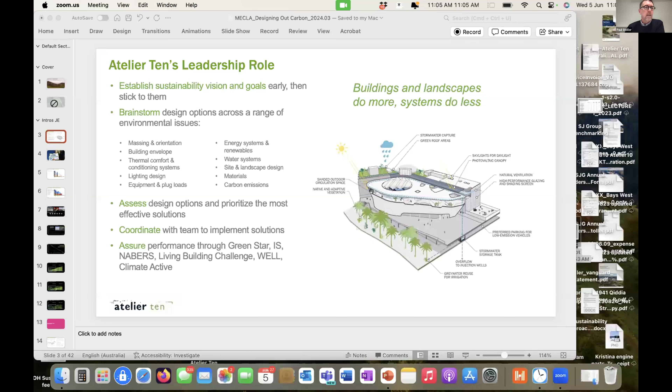So, again, g'day. My name is Paul Stoller, I'm a director of Atelier Ten. I'm going to set the stage to talk about what are the kinds of carbon emissions we think about and how to consider those as a designer when you're looking at projects in the built environment. And just to note, that's what we at Atelier Ten do every day - we imagine what is the more sustainable world that our projects can contribute to, brainstorm a whole range of ways to deliver sustainability outcomes, one's in the brief, one's beyond the brief, and figure out the most effective way to get there.

So this is a really exciting time. The climate is changing, and we as an industry are moving rapidly to catch up. I wouldn't say we're not changing, but we need to keep changing our practices and our thinking, and that's at the center of my talk. We have spent a good solid decade of data-driven Green Star rating assured thinking about how to reduce our operational emissions, the emissions that come when we buy power from our grid, which has a lot of emissions associated with mostly coal-fired power plants.

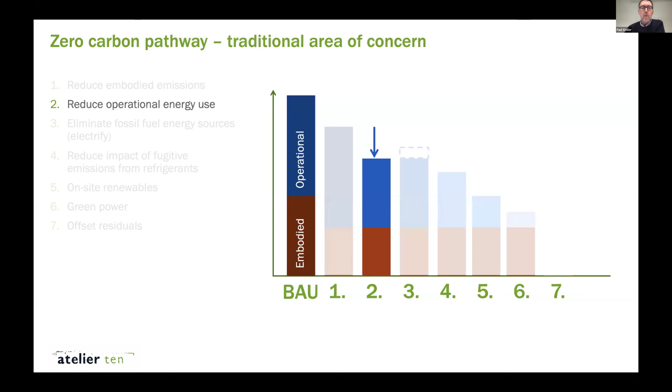We've thought a lot about how to reduce emissions and we're doing a very good job of that. But we're now in an era where we need to think about all the steps to reduce emissions in our buildings, from embodied emissions in materials and construction, right down to wonky things like fugitive emissions from refrigerants, green power, and so on. I'll be talking about operational and embodied emissions as a designer, which are the two biggest chunks.

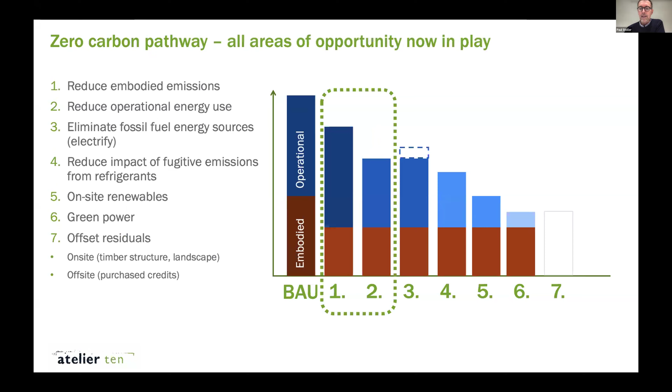As a reminder, embodied emissions are the greenhouse gases emitted when materials are extracted from the ground, processed, turned into products, moved to your site, put into your buildings, and got ready to run. They also include the end of life of your materials, what happens after they come out of your building—that will be more the subject of Philomena's talk, and better ways to find new life for our products. Operational emissions are associated with the power we buy.

It's the stuff that comes out of smokestacks at coal-fired or gas-fired power plants, much in discussion these days. Globally, greenhouse gas emissions in most power grids are going down because of renewables being added to the grid.

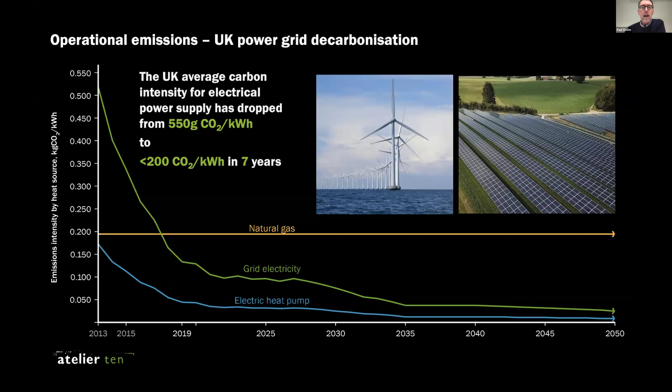You can see here the emissions intensity of the UK power grid, which fell off a cliff in a good way between 2013 and 2019, to the point that it's radically changed the way we think about designing buildings overseas. Here in Australia, we're not quite that far along our journey, but we're moving quickly to add renewables to the grid.

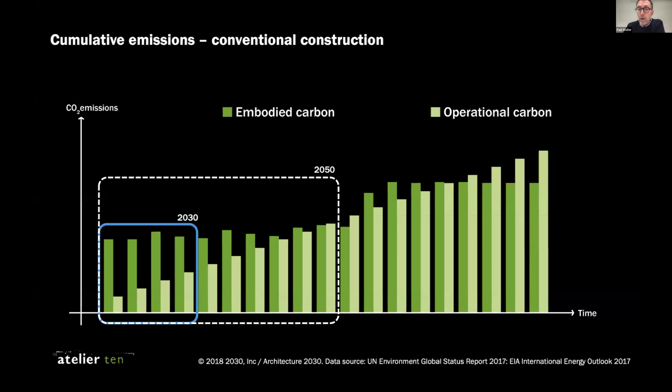So what does this mean for our buildings? Conventionally we thought operational emissions really dominate, especially when our buildings weren't very efficient. But with a good, new, energy efficient building, we can see that even now, with our current grid emissions, embodied carbon is dominant for at least the next 20 years in a typical building. We really need to think about embodied carbon as much as we think about operational carbon.

Now, for super efficient buildings, embodied carbon is dominant. As a person, and as a company committed to absolute zero carbon, we spend a lot of time now driving down embodied carbon in our projects. Operational carbon is of secondary importance, and it's also less time sensitive, because we need to get rid of emissions now, and the embodied emissions happen now.

Interestingly, as our grid decarbonizes—which we're seeing elsewhere in the world and happening here—and as we add renewable power to our buildings, either directly or by buying it when emissions are low and storing it, we also see that the embodied emissions dominate forever. So really, getting rid of embodied emissions is the name of the day.

As we come into a typical day, in the middle of the night there's a background power load. As renewables come online in the morning, as the sun shines and the wind blows, you can see the emissions intensity drops. You can also see over the years it's dropping more and more as more renewables come online. In the evening, when everyone goes home and the sun's gone down, emissions spike as we all get our cookers running and our heat pumps running for heating or cooling.

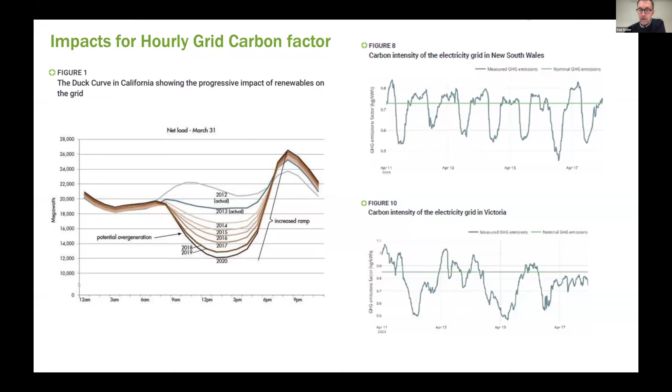You can see on the right side the emissions intensity reflected in a 24-hour cycle as the renewables come in and out. We need to shift our loads to that most efficient, emissions-efficient time of day.

These are really practical things you can do without buying a single new piece of kit—so no embodied emissions intensity penalties with this.

You can pre-cool your building. So when it's morning and emissions are going down, you can run your building on the cold side, then let the temperature drift up during the day. That's not a design thing, but it's what everyone can do right now with their buildings. It's done at buildings that are well run, like UTS Business School and the Sydney Opera House. With a little bit of kit, adding thermal storage tanks, you can run your buildings, say on a weekend, store up thermal energy, hot water or cold water, and discharge it the next day. You can buy yourself time-of-day or even multi-day power shifting.

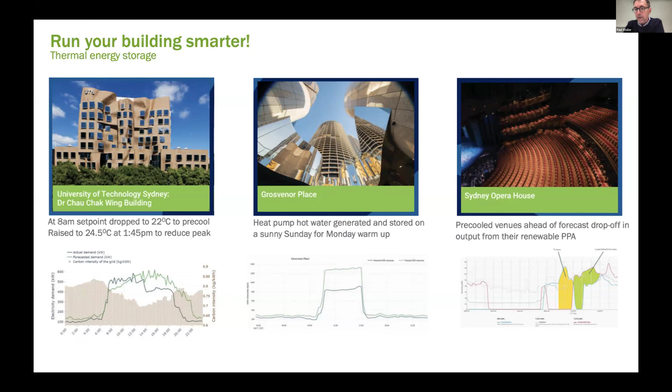That raises a practical point about what design consideration this needs. You can already do it to some degree just by running hot or cold, but if you leave space in buildings for thermal storage, essentially tanks to store chilled or hot water, you can do pretty active load shifting. Thermal energy storage is as good as electrical energy storage. It's a practical, very low-tech way to store energy so you can generate your cooling or heating when grid emissions are low and discharge them when grid emissions are high.

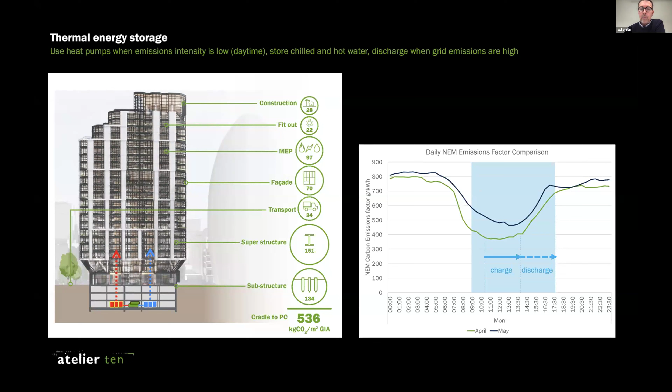This is practically a great way to move towards what we call absolute zero carbon—more on that in a moment. The next step beyond thermal energy storage is battery storage. Just like we store thermal energy, we store electrical energy in electrical batteries, charge those up when grid emissions are low, and discharge them in your building when grid emissions are high.

Some would argue we should be doing this at grid scale, and that is where a lot of it's happening, but there are practical benefits to doing it at building scale. We move the load around and reduce the need for transmission lines—there are big system benefits. There are also real cost benefits: if you actively manage your power to buy it when it's cheap and emissions intensity is low, you reduce your building's operating cost. If you participate in a virtual power plant, there are ways to get rewarded.

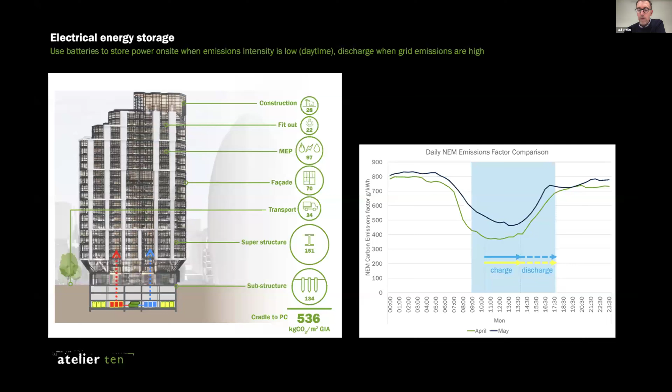So having space for power energy storage on site is step number one in reducing operational emissions—store energy when the intensity is low. This is a critical thinking shift that's happened overseas and should be starting to happen here. California has fundamentally changed the way carbon performance is measured—it's called total system benefit there. At Atelier Ten, we wrote a paper on this several years ago, the future of carbon neutral design, exploring how designers consider the importance of time-of-day carbon use and energy storage.

You're welcome to find and download that paper—it's on our website. The critical thing here is we have to be thinking about operational carbon and embodied carbon back and forth. They interact, they need space, they have consequences. It is not just a one-and-out process, not just operational, not just embodied.

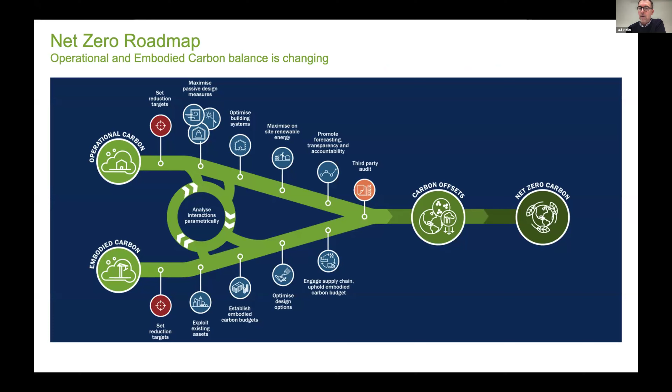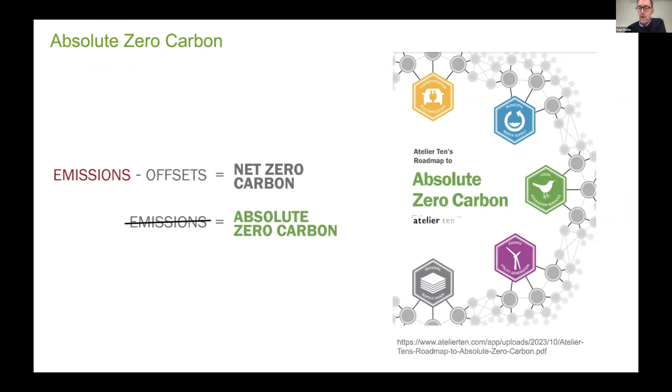I mentioned before this term, absolute zero carbon. We at Atelier Ten, and many we work with in industry, acknowledge the importance of offsetting, which gets us to net zero carbon, which we're all committed to. But we also need to think about absolute zero carbon—actions we can take right now to reduce actual emissions right away without having to compensate elsewhere. This is the most effective way to get to a climate active outcome. Again, we've written a paper on it, and you're welcome to download that.

Now let's shift gears and talk about getting rid of materials. The best way to reduce our embodied carbon, which goes into the atmosphere right now, is to get rid of material. Here's a graph showing where the bulk of the material is—the bulk of it's in the structure. So structural engineers, this is your chance to be a hero. Architects, this is your chance to be a co-hero by not putting undue structural demands on your projects.

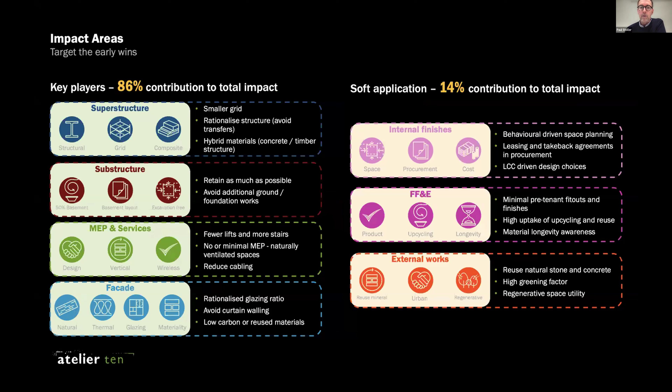Again, it depends on the kind of building, but the vast majority is in structure, superstructure, facades, and MEP—more than half typically in superstructure and structure. Finishes, FF&E, and fit-out matter too, especially because they tend to churn at a high rate, unfortunately, but the vast preponderance is in the building core. So practical things we can do as designers include, like the project on the left, taking an underloved old building and giving it love to make it awesome and new.

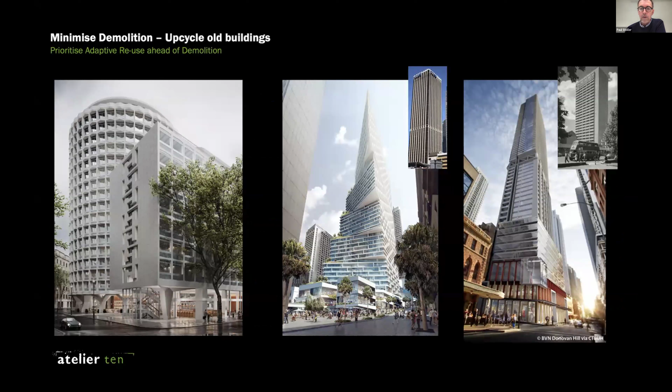We've done really great examples of that in a very deep way here in Sydney with Quay Quarter Tower and the Greenland Residential Tower. Those were old structures given new life to keep their cores and floors active—substantial, deep, adaptive reuse retrofits, really great examples.

Other things you can do where you are doing a new building: get rid of basement space, get rid of structure, get rid of materials, think structural efficiency. A huge amount of embodied emissions go away when you rationalize your structure.

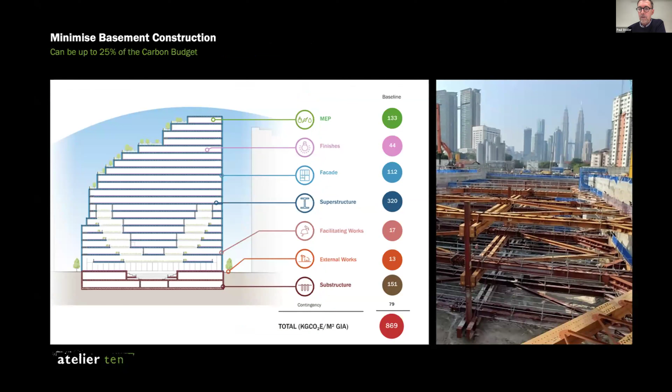Specifically basements, lots and lots of material, lots of embodied carbon. Basement space can be low value. Often there's parking, which is high value in Sydney still and elsewhere in Australia, but there's a huge amount of emissions tied up in those substructures, especially in the works to hold them up. So just get rid of them.

That's really critical. Build lower. You can see the taller we build, the more we've got to do with wind load, pushes up the core loads, et cetera. Not to say we don't do tall buildings, but there's a point of diminishing returns around 30 stories. It also happens to work out well with lifting.

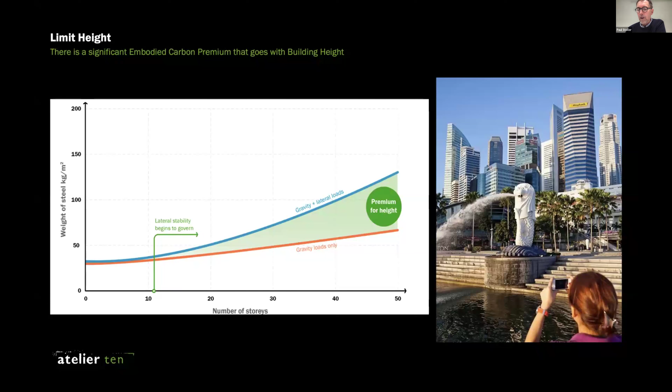Form factor matters a little bit. We wouldn't normally push this one hard because if you get buildings too cubic in proportions, you end up with bad daylight in the middle, but it does matter a bit.

Column grids, these matter a lot. If we reduce column grids even a little bit, we can knock 15, 20% out of the total structural volume. That is real dollars saved. It freaks out the leasing agents, but they'll come around eventually.

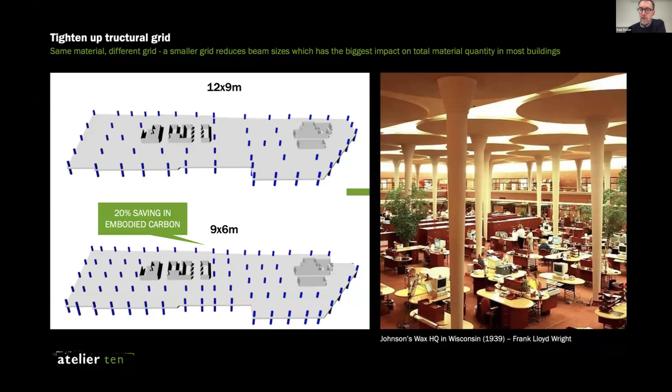It's a long game. Cantilevers, a little bit for drama, sure, but fundamentally, they are enormously material intensive. There's an example here in Sydney of a building under construction right now where a design excellence proposal to get rid of columns, to make a more dynamic street presence, has led to the equivalent of 20 stories of floor, concrete, and steel for one transfer level—20 stories of embodied carbon to get rid of 3 columns. I appreciate that streetscape may be a little more dynamic, but I don't think that's worth it.

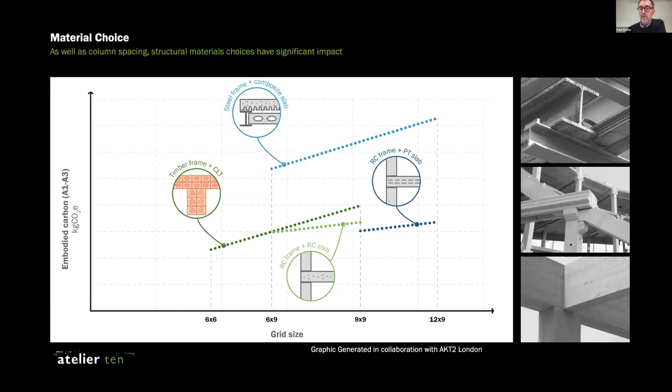We've got good data now on relatively carbon efficient structures. Essentially, reinforced concrete frames are the most effective way to go to balance spans with relatively low embodied carbon structures. Timber is also good, of course. Spans are a bit lower. Timber is also lighter, which reduces foundation loads. That's one of the real carbon benefits of timber—it makes for lightweight foundations.

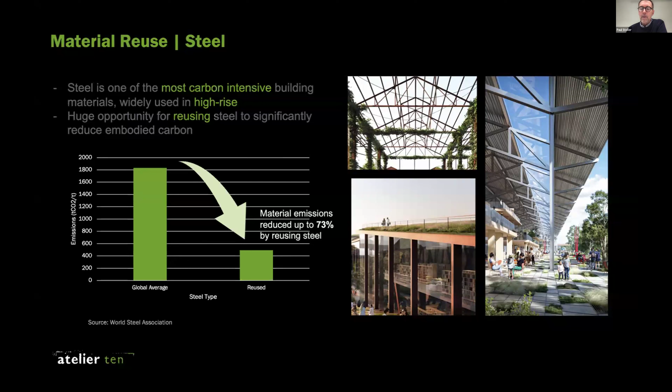Something new we are seeing in the UK is not just building with less, but actually taking old buildings, disassembling them, and putting those materials to use in new buildings. So existing office buildings that are coming down, steel frame, quite different than Australia typically—those old buildings are being bought, disassembled by the builders, and the steel is put back to use in new buildings. A market has been generated for this, and it is active. Massive embodied carbon reduction. This is, again, steel reuse: take the old steel, cut it, test it, cut it, put it into a new building.

MEP—we've made systems very complicated in the service of ultimate efficiency. We are now making them less complicated to get rid of kit. That extra little bit of marginal performance is just not worth it in terms of embodied carbon, massive uptick. So lots and lots of these things together get us to substantial embodied carbon reductions.

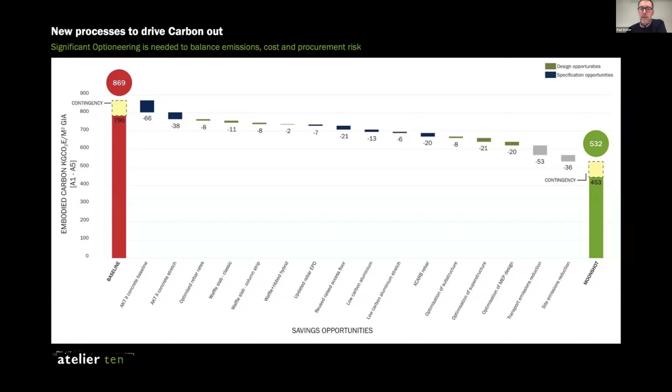It's a long, hard slog. There is no silver bullet, let us be clear, but we need to tackle them all. We're getting better data—MECLA is central to that, getting better data. We're all developing better methods. We all need to keep sharing those methods. It's critical to do that.

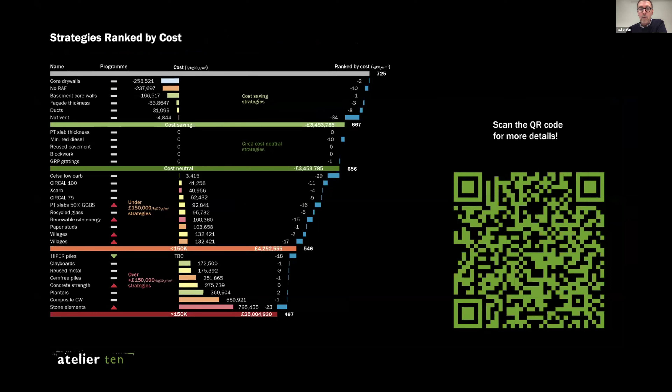You're welcome to scan these, look at some of the tools we've developed to tackle embodied carbon, which includes games, because God, this can be so tedious sometimes. Carbon accounting is, oh, for the obsessive compulsives out there, cool—I know you love it, I love it too—but make it fun wherever you can, so you can also raise awareness.

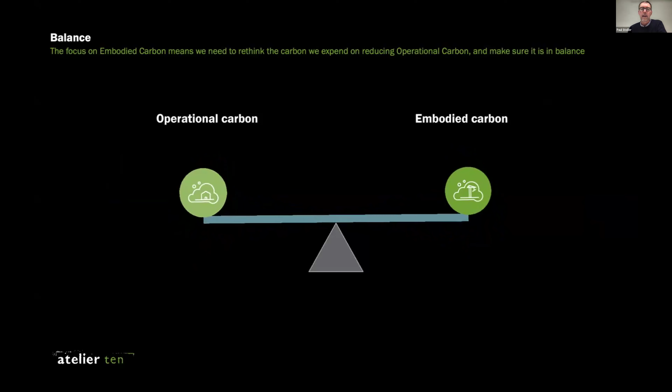Design processes have to change and are changing, so that we can better balance operational emissions, which are perhaps a bit less important than they used to be, compared to embodied carbon, which is absolutely important right now. And a reminder, we need to do this in parallel, in sync, in all of our projects.

So just reintroducing myself, I'm Philomena Bashar, I'm a sustainability manager at Built. Today I'm going to tell you a little bit more about our newly released white paper on how to write a building disassembly plan that Built co-wrote with circularity consultant Coreo. So just a very quick snippet about who's Built. We're a construction management company, the third largest company that does that in Australia, and we have offices also in the UK and New Zealand. We have been around for over 25 years.

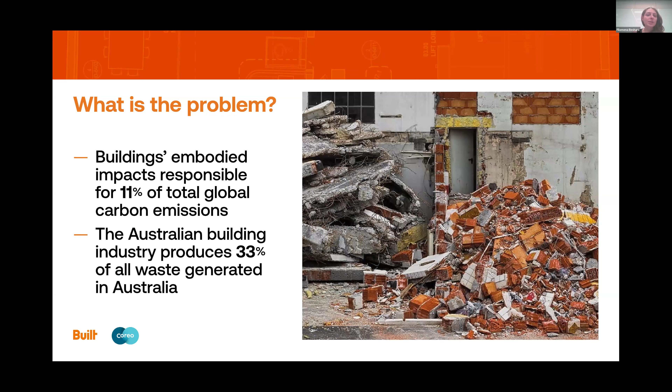Let's talk about the problem. What really pushed us to write a paper around design for disassembly? We're all here, so we probably all know the impact of buildings on total global carbon emissions. It's huge. But the other problem is that the Australian building industry is also responsible for a big chunk of all waste generated in Australia. So in order to solve these problems, we need to think about the construction industry in a more circular way. And design for disassembly presents itself as one of the solutions available out there.

So a quick reminder for people who never heard about design for disassembly. What is it? It's really a design technique that enables material components and products to be dismantled at the end of the building's life cycle, so they can be reused, resold, donated, or recycled. As I said, it's just one of the tools in the toolkit in order for the building industry to become more circular. The white paper that we wrote focuses on how to write a building disassembly plan.

And you're probably wondering, what is a building disassembly plan? If you think of an IKEA manual, it really tells you step by step how you need to assemble all the components of your piece of furniture so that it comes together. A building disassembly plan is obviously for a building, and it's a little bit of a reverse of that. So it's a manual that tells you how do you take this building apart, from the first component until the last one.

We found that this was a crucial document if we're thinking about designing for disassembly, because you must have all the right information available for when the building is going to be coming apart, so that you can disassemble all the components in a non-destructive way and reuse them elsewhere. We thought it was really crucial also because a building designed for disassembly is potentially going to be taken apart 10, 20, 30 years after project completion. Therefore it's very important that there is a document that is the only source of truth, compiling all the right information so that its components can be taken apart and reused elsewhere, even while the building has probably changed ownership multiple times during that period.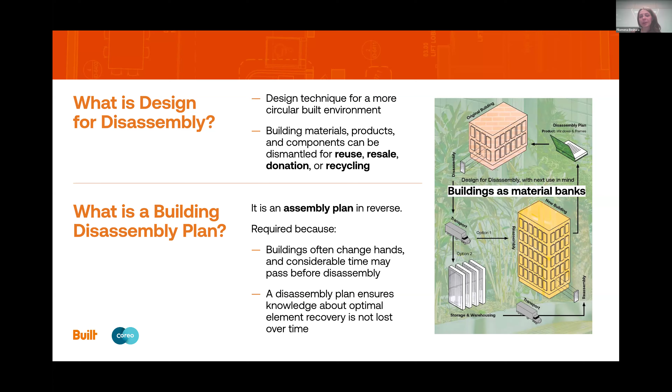So why do we think design for disassembly is relevant? Well, first and foremost, because, big reminder, we actually have a target in Australia to be 100% circular by 2030. And currently Australia is probably in the single digits. Also, for whoever's been paying attention, there's been a flurry of policies in the last couple of weeks that mention circularity and specifically design for disassembly quite a lot, especially looking at the recommendations to the government by CMAG, or the environmentally sustainable procurement policy, which is going to be affecting a lot of government projects. So these policies are not just pieces of paper, but really strong signals from the government telling us where they want the construction and building industry to go.

It's becoming harder and harder not to listen to those signals. The other reason why design for disassembly is really relevant is because buildings have a huge impact on the environment, and design for disassembly presents itself as one of the solutions to lower the carbon emissions associated with new construction by using existing materials and honoring the embodied carbon already embedded in them. That allows us not only to lower carbon emissions but also to minimize the negative impact on nature by reducing the need for virgin materials.

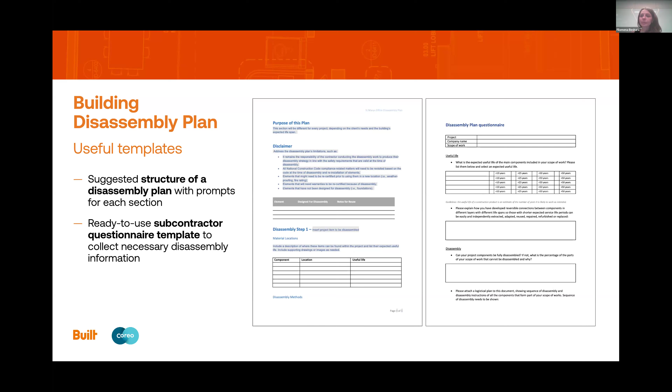Okay, so the paper is also going to include a sample section. Again, this is based on a real example of writing a disassembly plan. It's going to include a little paragraph around what building component we're talking about, where it's located, exactly like an IKEA manual, as I explained before.

And then there's going to be a narrative about how these components can be taken apart in a non-destructive manner. That narrative can be translated in many different ways—through the use of BIM models, marked up shop drawings, photographs—depending on the owner's directives and the ways the subcontractor feels more comfortable generating that information for you.

The section is also going to include a paragraph about storage and notes for recovery, so that 10, 20, 30 years from now, whenever you're taking those elements of the building apart, you also know how to store them properly so you can retain as much value out of it as possible.

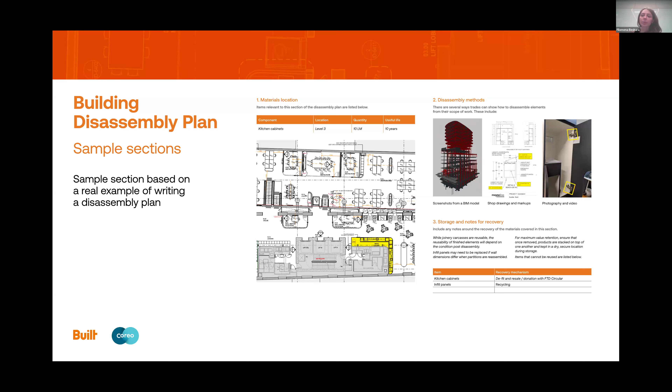The paper is also going to include frequently asked questions. How do I start designing for disassembly? There's plenty of resources out there, so we're going to point you in the right direction. We talk about the value of design for disassembly, what the enabling factors are, how to make it happen on a project, and also my favorite question, the one I get asked the most, which is, does it cost more?

We also included some case studies from other projects that have implemented design for disassembly, and we share some inventory platforms available here in Australia to facilitate data collection in case you want to go a step further on your project. Finally, we've included some insights from writing a design for disassembly plan on projects.

We are really keen to hear from the industry, get some feedback, and improve the way we are doing design for disassembly in Australia.

And that was everything from me. I invite you all to please scan the QR code or go on Built's website and go check out our latest paper. Thank you. Philomena, thank you very much.

I think the key word there was non-destructive disassembly. We've all seen the bulldozers and the grabbers and the ripping apart of built form, so that's a key word. Also the fact that you touched on cost, one of the questions in the Q&A was about that, so maybe you could respond to that in the Q&A. Great that there's a case study that goes to that, because anyone with a commercial interest in a building will be asking that question. That'll be the first question, Hansen.

Okay, get myself sorted. Hopefully you can see that. Why can't I get to... There we go. All right.

So I'm Paul Reedy from Fitzpatrick and Partners Architects in Sydney. I'm going to rattle through the first three pieces of this, hopefully relatively quickly, in order to get to the case studies. The case studies I'm going to show are a built project which is an adaptive reuse, a project in design that's an adaptive reuse, and a living building challenge project that we're working on at the moment as well.

I'd like to start with an acknowledgement of country. Our studio is on Gadigal land, as is one of the projects I'm going to show. The other two projects are on Camaragal land and Wadjuk land in Perth. I'd like to pay my respects to elders past, present and emerging.

For Fitzpatrick and Partners, design and carbon strategies kind of started as a 'how do we start, how do we move forward' with a series of strategies. On the left-hand side, we've got some really big picture strategies around not building on greenfield sites, planting more than we remove, honoring existing already spent carbon, and remembering within all of this that we design for human joy and delight. We don't design to remove carbon - that's a part of the process of getting there.

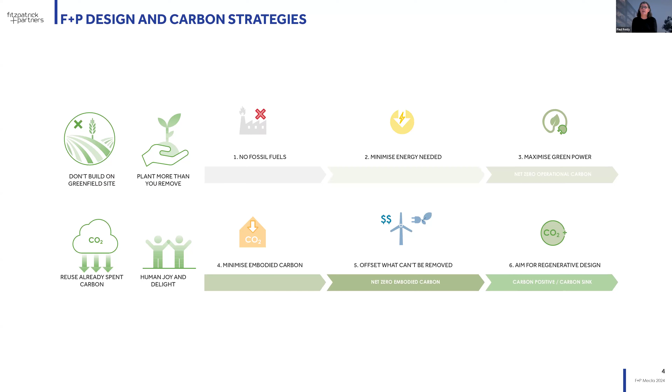And then some tactical steps on that: no fossil fuels in our projects, minimizing the energy that we need by building efficiently, and maximizing green power gets us to effectively a net zero operational carbon position. Today's topic is minimizing embodied carbon, offsetting what we can't remove - Paul mentioned offsets earlier, agree, it's a bit of a bad topic - but anyway, our aim is for regenerative design, being carbon positive, leaving more than we take away.

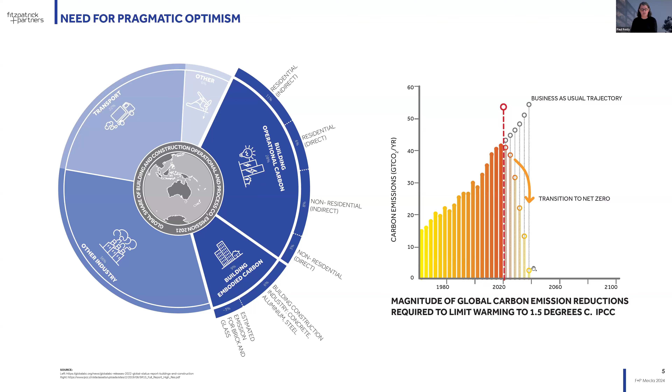Everybody's probably seen the diagram or a version of it on the left-hand side, about the quantum of carbon that's in buildings relative to everything else. Today we're going to talk about the bottom slice, which is embodied carbon. The diagram on the right talks to the history of where carbon in the atmosphere has gone and where we need to take it. At Fitzpatrick and Partners, we're taking a pragmatic, optimistic approach - a straight line between two points. We need to plan for it and just get on with it.

Embodied carbon is made up of the in-use stage and the upfront stage. Another way of looking at that is the pie chart - they're effectively 50-50, not quite. In terms of where the carbon is, the first half is the construction project, the architecture project, etc. This carbon is released into the atmosphere before the project is occupied - that's upfront carbon. The other half is the embodied carbon in the occupied life of the project.

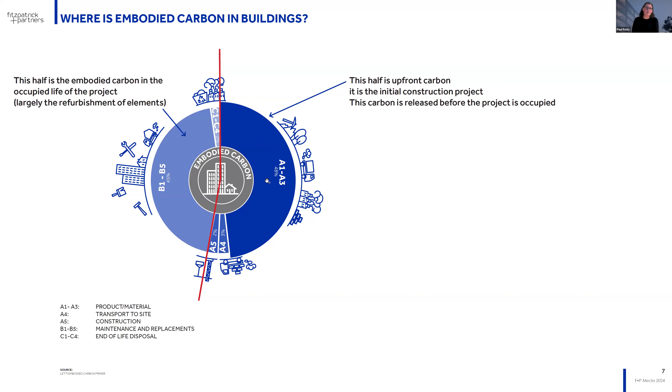That's largely the refurbishment of the elements over time, which relates to how long the building lasts. Our focus is on the front bit, where the architecture project is, to look at the scale of the different components. This is for a generic office building, and the numbers slide around between different sectors, but fundamentally superstructure is the biggest, substructure second, then facade, MEP, and internal finishes as a hierarchy.

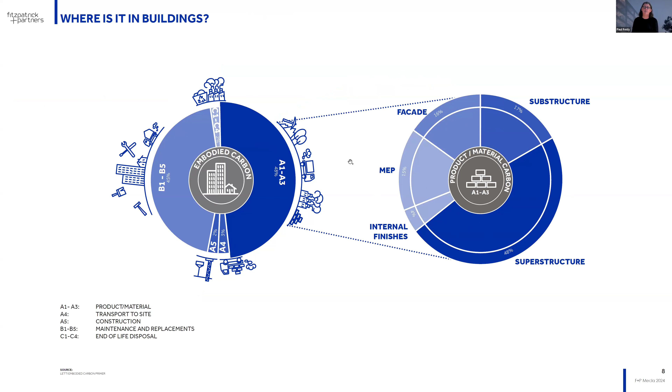So we started by looking at structure. An approach that LETI put forward — I think this is a LETI diagram, it's a really great diagram.

First and foremost, build less — if you don't build at all, that's no carbon. If you build less or build more efficiently, that's good. Build light — conceptually that's about grids and structure and some points Paul made earlier. Build wise, which is circular principles. As Philomena talked about, build in low carbon or biogenic materials, build for the future — designing for disassembly and circularity — and build collaborative. We can do this together; we can't really do this at all on our own.

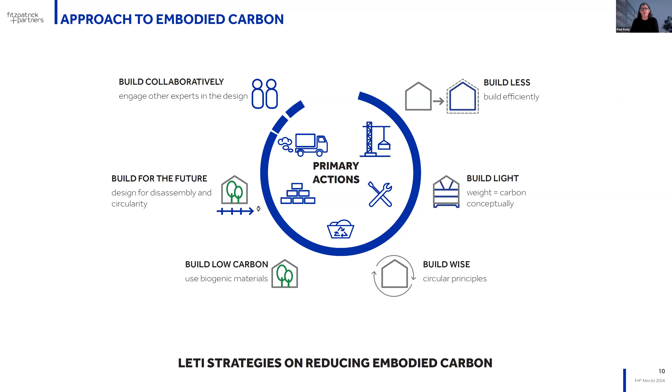From Fitzpatrick and Partners' point of view, we added some first steps, which is accept responsibility. Architecture equals carbon — there is carbon in architecture. That's a fact. We've got to start with that knowledge and move forward from there.

We've got to learn as we go. I think the industry as a whole has a deficit in terms of knowledge. Get measuring — you can't manage what you don't measure. Understand the supply chain — why is one person's concrete different to another person's concrete in terms of its number? Remember there are rabbit holes and you will disappear down them, so just come back up for air from time to time. And then sharing and advocating is really what today is about.

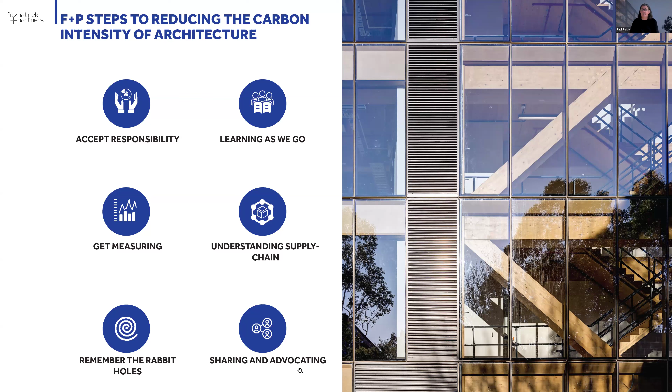From Fitzpatrick's point of view, we developed an embodied carbon tool — you can get it at embodiedcarbons.com. It allowed us to analyze against three different data sets to understand that the three generic data sets gave us different numbers and that they weren't consistent. We learned a lot by understanding that kind of process.

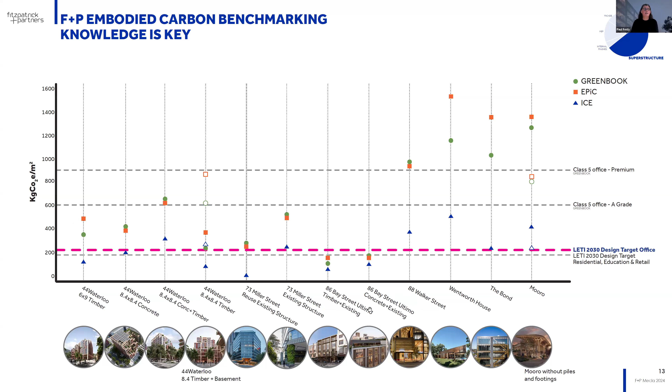That tool is available publicly, with two freely available ones being EPiC and ICE as well. We've used it to chart all of our projects trying to get to some form of benchmark. The benchmark here in pink is the LETI 2030 design target for office, reduced for just the structural component, and we measure with the blue triangles — the ICE database, the relevant data set for LETI — where our projects sit relative to that. Some are already below, which is fantastic; some are above, which is something for us to learn, and generally that's around smaller projects or really, really tall projects.

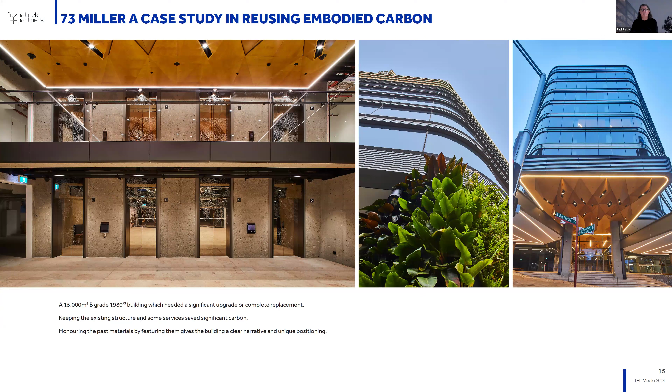More on that later. So the first one is 73 Miller. We completed this project about 2.5 years ago in North Sydney on Cammeraygal country. The building was a 15,000 square meter B-grade office from the 80s, which we were looking at either pulling down or significantly refurbishing. Keeping the existing structure and services saved an awful lot of carbon, and honoring the past materials of the building — built over a series of different ages — gave us a unique proposition in terms of how the architecture came together.

That's what it looked like when we came to it — a very 1980s building, lots of angles, lots of terraces. It was pretty tired, pretty anonymous from the street. And we changed it to look like this — we added 4,000 square meters of building. This building now contains TTW's offices, LCI's offices, and Aurecon's offices. Engineers love this building.

There are other people involved as well, but it's come together as a really good project. I think some of the real outcomes for us were that reusing all of the existing structure and services saved significant carbon.

We ended up with 19,000 square meters of A-grade office building for only 4,000 square meters of new structural carbon, which reused 7.1 million kilos of carbon. The structural carbon cost only 21 kilograms of CO2 per meter squared, which by any metrics is awesome, because we only spent 4,000 to get 19.

The building also has 100% green power, a 5-star Green Star rating and 6-star NABERS. It's got a solar farm on the roof and a series of other really good upgrades as well.

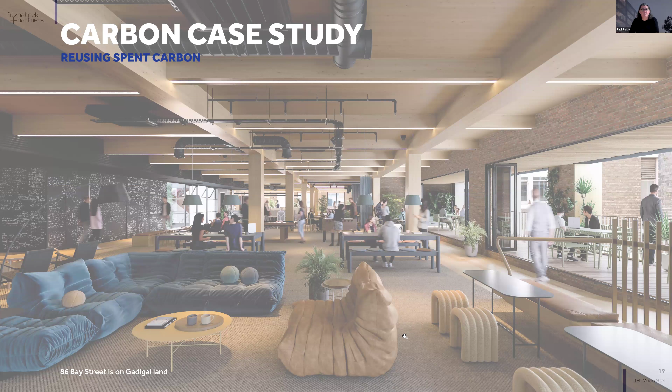So that's a built one. The next one is a building we're out to tender on at the moment - a carbon case study for reusing embodied carbon at 86 Bay Street.

Really exciting project. It's awesome, isn't it? I'm sure everybody loves it. Ours is the building in the middle - before, an ugly duckling, and after.

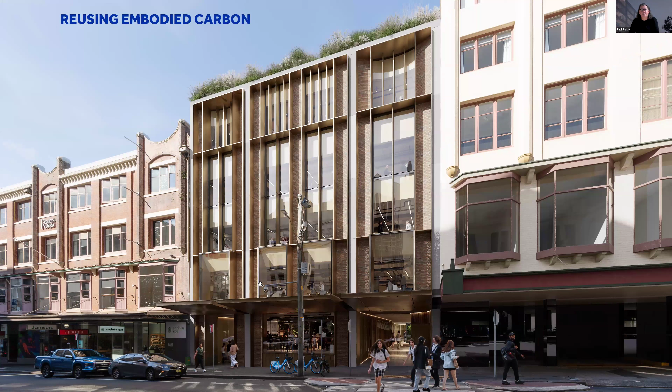So what we intend to build at 86 Bay Street fits in between two heritage projects, maintains the existing building's structure - or the vast majority of it - and puts a new building on top of it and around it. In essence, we've maintained the bottom 3 floors, which are concrete.

We've brought a new light well through the back of it, and added 3 stories on top in timber. So the focus has been first and foremost on embodied carbon.

Secondly, it's a fully electric building, so no fossil fuels. It's got a solar farm on the roof, operable facades both to the laneway and to the courtyard, and a whole series of other really cool initiatives in terms of sustainability.

But the big move here was keeping the existing building. Rather than demolishing it, by keeping it we kept the slightly lower floor-to-floors on the bottom 3 floors, which allowed us to sneak an extra floor in.

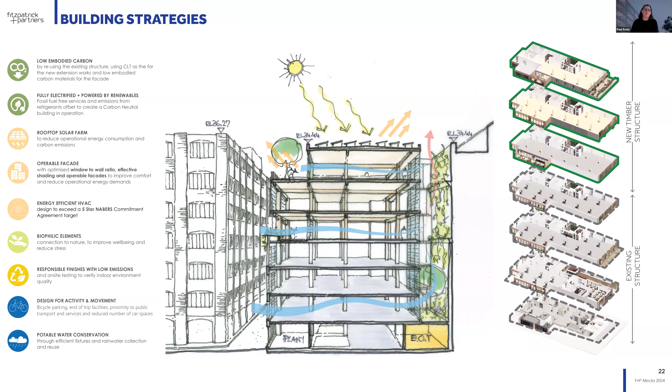So from a project finance point of view, this made a lot of sense, as well as obviously from a sustainability perspective. The first thing we did was assess the new build on top in timber rather than concrete. Retaining the existing building saved us 450,000 kilos of CO2.

Adding the new floors in timber rather than conventional concrete saved an additional 410,000, and we avoided spending 1.7 million kilos by not demolishing it and rebuilding in concrete. So all in all, a really good story in terms of embodied carbon numbers, using the app to assess against different data sets and really understand where the big bang for buck was.

So I'm probably going to spend most of my time on this, which is a Living Building Challenge project in Perth, in Wadjuk country. Living Building Challenge, for those who don't know, is a really great tool, a really great philosophy about how to build.

This building will produce 105% of its own power on site. It'll capture and reuse all of its own water, including black water treatment, with a super high-performance building envelope that really drives down energy - more about that in a minute.

Embodied energy minimization has been a real focus, and there are some real lessons to learn in that. Optimizing for transport use, it sits within a couple hundred meters of a train station.

Biodiversity is another great part of the LBC, and 10% of this building's roof will be an urban farm. And then obviously the aim is to build an exemplar live-work building - a whole series of different initiatives.

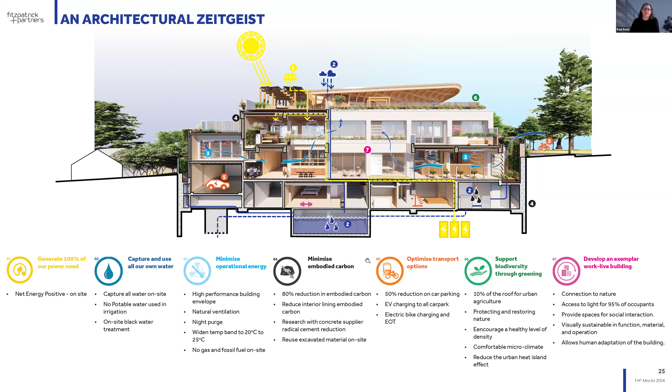I'm going to focus on the carbon-related ones in the main. The first of which is to make the carbon apparent. So in this instance, what we did was look at the building in terms of its materials.

In blue, sorry, I'll just move you guys out of the way - in blue you'll see the concrete. In pink is rammed earth. In green is blockwork, and yellow is timber.

It's a single basement for 12 cars, end-of-trip facilities, a gym, and a lot of plant space. That's in concrete and rammed earth. Above that, it's mass timber, rammed earth and brickwork walls.

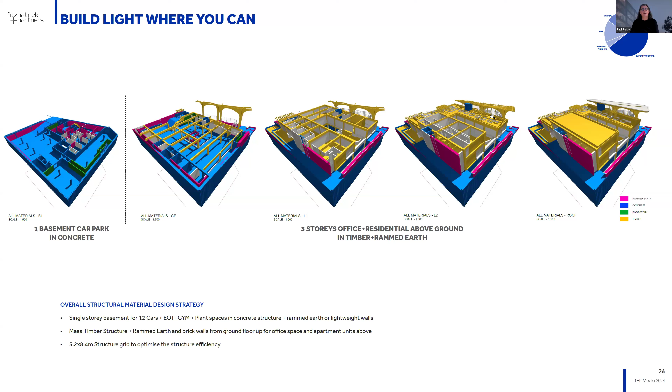And then the structural grid has been optimized for material efficiency. This is building light where we can, so everything above ground is in timber, fundamentally as a structure.

We then looked at that ground floor slab - talking about building weight. And we looked at 9 different options for that ground floor slab.

We analyzed them in a 2-bay grid, and we looked at the carbon content of each of those using conventional concrete and steel to see where the carbon was. We then looked at what happens if we use a geopolymer concrete and conventional steel.

Option 8 in this instance went from 19,000 kilos in that 2-bay grid to 9,500. Option 3 is only 9,800 kilos in that 2-bay grid. So this is about relativity rather than about final numbers.

We then looked at what happens if we use reused steel and geopolymer concrete, and we were able to push option 6 into the mix, which was steel beams and metal deck slab, getting down to 6,800. In the end, we didn't do that because we couldn't get the steelwork tested without shipping it all over the country, and that became something of a problem for us.

So rather than do that, we opted for the conventional system, which is reinforced concrete flat slab with drop panels, which got us to 9,800. So already half what the previous number was, and relative to the top number, which is 73,000, which would have been a very beautiful brick vault.

But we did that to try and save carbon, and then realized there was an awful lot of carbon in what we were trying to save. So we opted for option 3 in that instance.

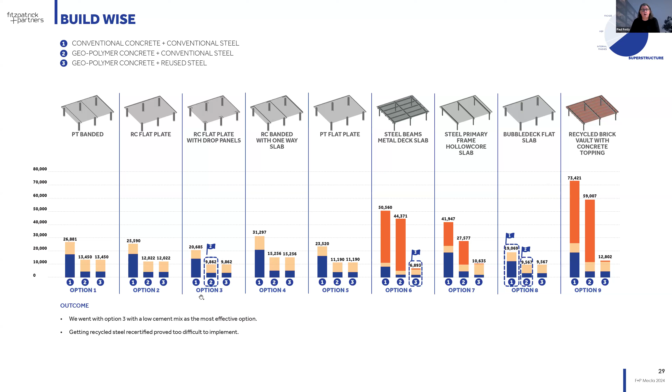We then look at carbon in terms of building low carbon. So when we analyze the building, this fundamentally looks, feels, and is a timber building. But when you look at the carbon, it's all in the bottom of the building. So looking at it by structure, B2, which doesn't actually exist, it's just tanks and piers or piles, sorry.

B1, which is our first basement, is our biggest component of carbon. Then the ground floor, of which in blue you can see the carbon that's in the concrete, level 1 and level 2. Or looked at across elements.

The biggest elements are actually the piles and the footings, followed by slabs and walls. So that's an awful lot of carbon to get to this building, and that's to do with the fact that we built a basement on land that is pretty soft.

Then we looked at building in low carbon. So rather than having that B1 slab at conventional concrete, we looked at what happens if we go to a Boral Envisia type product, and we save 280,000 kilos.

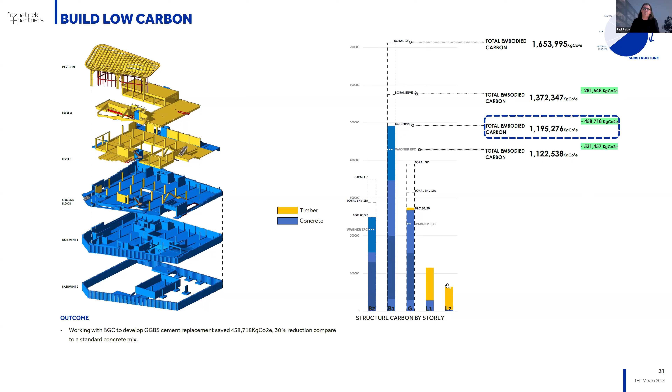We looked at it, we're experimenting with BGC on a really high performance, low cement concrete, and saving about 450,000 kilos. And then we looked at a geopolymer concrete, which would have saved us even more, proving very difficult to get in Perth. So we're still looking at building in low carbon within the material that we're building in.

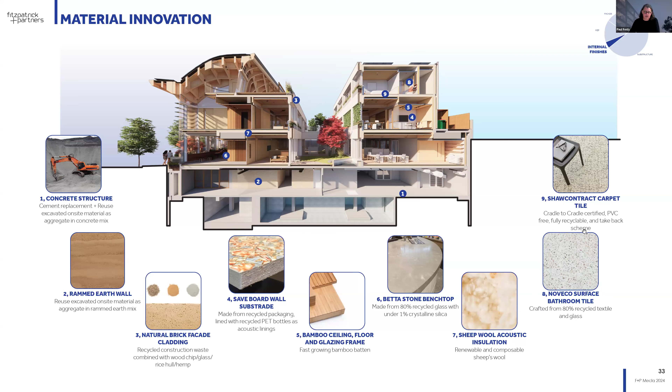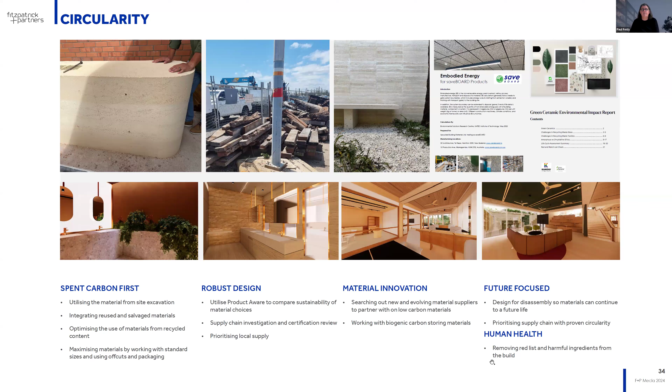Final couple of slides then. In terms of circularity, spent carbon first - that's about reusing materials as much as possible. Robust design, so understanding your supply chain. A bit of a plug for Product Aware from Architects Declare - if you don't know what it is, go and have a look at it. Material innovation, which is a real focus, and working with biogenic carbon storing materials as much as possible. Future focus, which is designed for disassembly, and human health, which is building in materials that are good for us, not bad for us.

My last slide, and I always like to finish with this one: do the best you can until you know better, and then when you know better, do better - from Angelou. Thank you.

How'd I go on timing, Hudson? Pretty good, considering you were threatening 16 or 17 minutes. Very good, and look, really fantastic. I think case studies are always great to make it real, and the way you've stepped through each building element and all of the considerations at each stage before you even look at material selection, and then you get into the materials and some innovative materials there. So really looking forward to bringing you back into the conversation, but thank you for that. I was scribbling notes furiously. That was fascinating. So thank you, Paul.

Next, we're going to turn to Tom Petty, builder, architect, tech entrepreneur. Makes you sound like you should be flying in a corporate jet, Tom. I know that's not the kind of tech entrepreneur that you are, but I'm very keen to hear about Carbon Trace. So take it away.

Thank you very much, Hudson, and thanks to MECLA for being such an important part of understanding embodied carbon and bringing together so many different components of the industry. I'd also like to reiterate deep respect for First Nations people, particularly in any conversation involving the urgent need to decarbonise our current society. Carbon Trace came together with myself and Ben Crine. My background's architecture - been 15 years building residential homes, fell down the embodied carbon hole 5 years ago and met Ben last year. He's a civil engineer with a fascination for optimization of structure and cost. We came together and started to look at the need to tackle residential embodied carbon specifically.

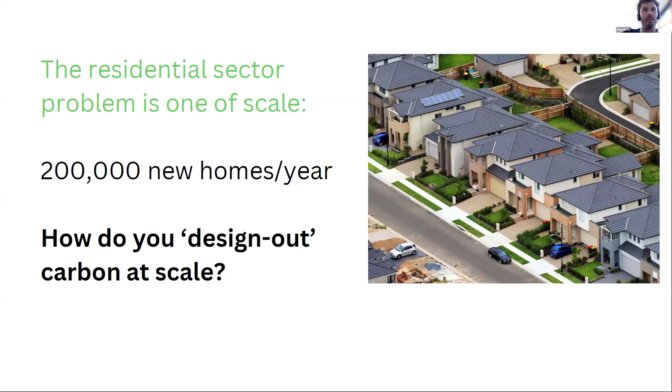And so today it's this kind of scale shift, I suppose, my bit of the presentation. The residential sector is one of scale - we're supposed to be building 200,000 new homes a year. And the question is, how do you measure it? How do you start, design, or understand and unpack this landscape at this sort of scale, where the literacy level is relatively low, the costs attached to it are negligible, and the industry seems to be in a state of paralysis? We saw the opportunity to use a NatHERS certificate as a way to start to measure and unpack the cold shell of a building.

It's a low cost and low friction way to start to put some numbers around the embodied carbon attached to construction at scale, with NatHERS being consistent and scalable in itself. We were very interested in trying to create a benchmark, which again NatHERS lends itself to, in that it's been around for a long time and has a lot of data. So we've built a...

Hey, Tom. Yes? Just Dominique here - in the chat, somebody's saying the PowerPoint's not visible. Can I just check, Hudson, IT people in the background, can you just check what's going on?

That is now, okay, they're all good now. Sorry to interrupt, I could see it, Tom. Okay, I'll jump it up. Just to confuse you. How we go? We good? You can see it now. Yep, all good, excellent, thanks Tom.

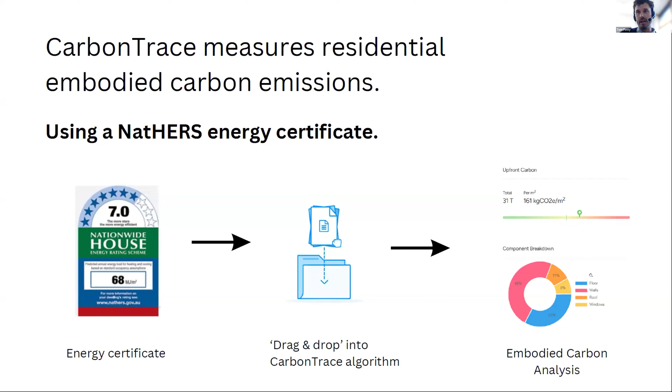Thanks Tom. So we take a PDF energy certificate, we drop it into our CarbonTrace algorithm, and use AI and all sorts of tricks, and we can spit out an embodied carbon analysis in a couple of seconds.

Essentially, we're using a cold shell approach, picking up the big ticket items which the other speakers have spoken about: foundations, external walls, roof and glazing, all captured in NatHERS certificates, to conduct this A1 to A3 analysis of the big bang for buck components.

We have entered a license agreement with CSIRO to access their NatHERS database, and we have run our algorithm 1 million times on every NatHERS certificate produced in the last 6 years.

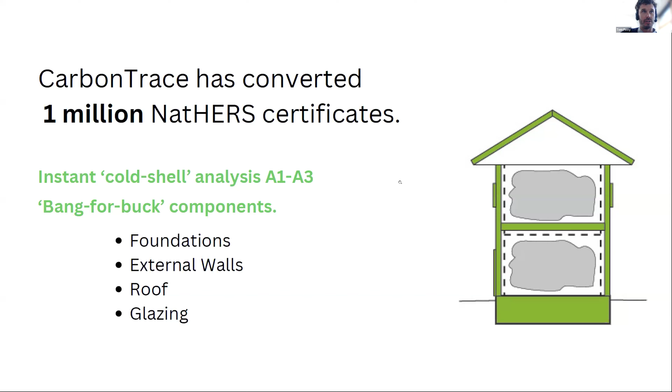Once you've got a benchmark, you can set a target. And once you can identify where your particular project sits in this landscape, you really start to change the conversation.

We are obviously very interested in doing better and empowering a literacy and decomplicating embodied carbon. So we have a web platform where you can input very simple rudimentary values and structural types and suppliers and start to play around to see that design decisions can start to move your dot around.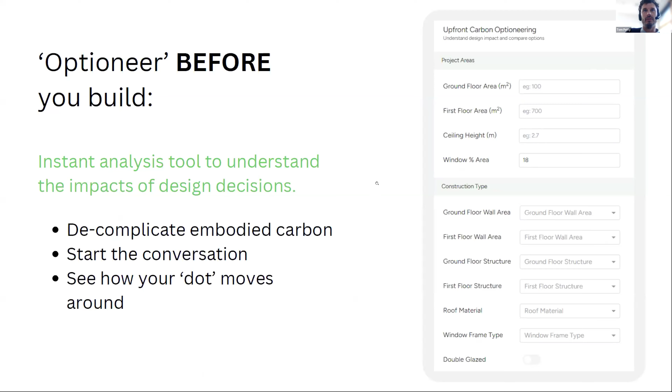You can start to gamify it a little bit and start the conversation in a sector which really doesn't have much of a conversation going at the moment, and there's not a great deal of bandwidth to really get into the complexity of it. So I'll illustrate here what this aspect of it looks like.

Here I've modelled a 2-storey brick veneer on a waffle pod. It's a normal sort of size building. It's sitting a little bit above the benchmark.

I've set my own target, which is to be better than the state average by 20%. So my dot is above the benchmark. My target's down here, I'm 30% off.

This tool allows me to start playing around with how I might move my dot down. It started at a 44-ton cold shell, and you can see most of that is floor and walls.

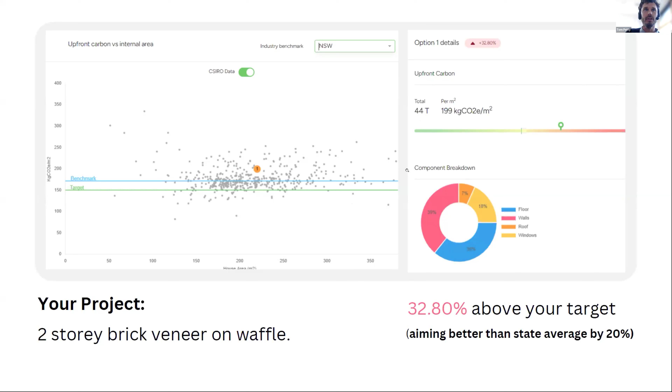First thing I do is change to a low carbon concrete. Get 4 ton out of the job straight away. That is a no-brainer. And here you can start to see that it is worth at least looking at that conversation and pushing pushback from contractors who might have issue with it, or examine further the costs attached to that.

Second, more drastic shift is more a design shift here, where if you change to a lightweight structure, to a weatherboard structure instead of brick, you end up pulling a lot of carbon out of the project, and your dot is sitting well below target now.

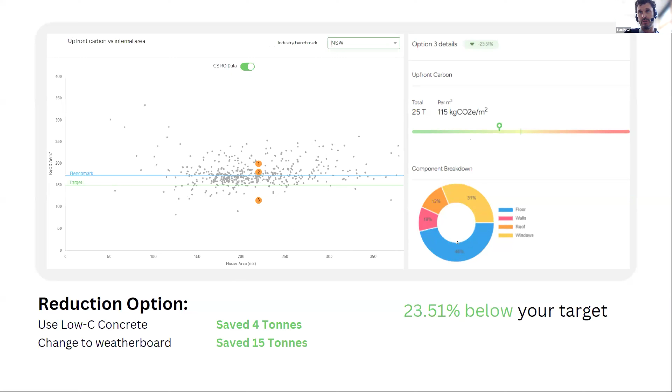The bulk of what's left is the slab. It prompts a design inquiry then. Do we want a weatherboard house, or could we do a composite?

So here I've got a fourth option, which is a brick ground floor structure and a weatherboard first floor. And I've also said, and the app allows you to look for a low carbon brick supplier and model that as well. So with this very simple exercise, you start to see how simple design decisions can move you around.

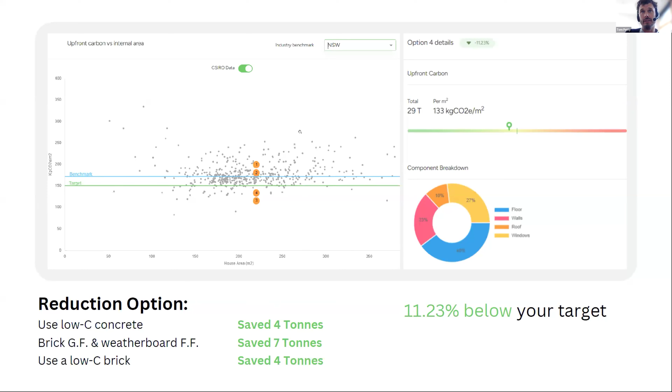You can see how you compare to the rest of the state or the rest of the country. And to reiterate on those design decisions, we've taken it from a 44-ton cold shell down to a 29-ton cold shell by 2 phone calls and deciding to use a bit of lightweight structure.

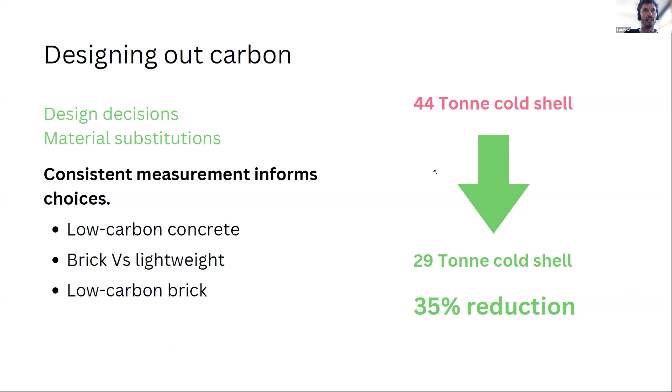And if we can do a 35% reduction 200,000 times, then we are talking about a big difference in the residential sector. To put this in context, and the reason why people might start engaging with it, I point to the mandatory ESG reporting which is impending.

Large corporates are being required to report on their Scope 3 emissions. That is big banks, big organisations.

While they might not necessarily be attached to the residential sector, everyone in their value chain is starting to see that gathering data and understanding emissions is where the future is headed. And it's becoming good business to get your hands and head around embodied carbon. If you're going to do anything at scale, it has to be because it's good business, not because it's a nice idea.

So our platform provides this portfolio emissions snapshot where volume builders, developers, LGAs, portfolio institutions or financiers supporting the entire industry can start to see their organisational benchmark. Where do they sit? If they've got targets, what is their starting point? And more importantly, if they've got a precinct, what is the net impact of that precinct? We can use the NatHERS certificates attached to all the projects in that precinct, convert them all, and output a snapshot of the company or precinct emissions profile.

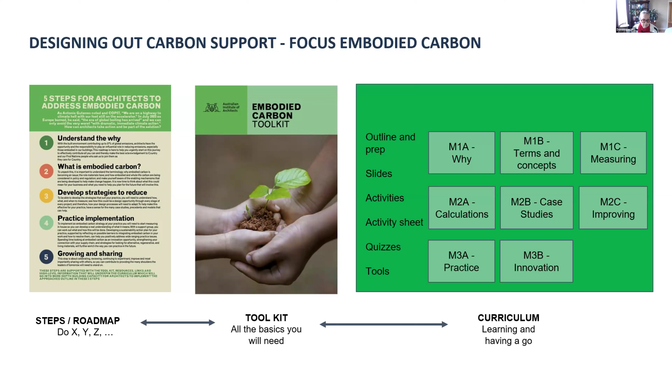And then there is an 8-module curriculum, which steps out all of the aspects of understanding embodied carbon, understanding how to calculate it, understanding where the data comes from, then understanding how to use tools such as Carbon Trace and others, things to improve with case studies, then what does it mean specifically for architectural practice, and then into that innovation space. So where are materials going? Looking at bio-based materials, and also some activities and discussions around all of that.

So the 5 steps, I won't spend time running through them in detail, but you can imagine it's really that 1-pager that you can just hand out to everybody in a practice and say, this is what we're doing. Not everybody needs to know the details.

The toolkit is just an online flip book that you can go through, and it covers all of this material. It's really about understanding the basics, understanding the case studies, understanding how to minimize it, and case studies and ways forward.

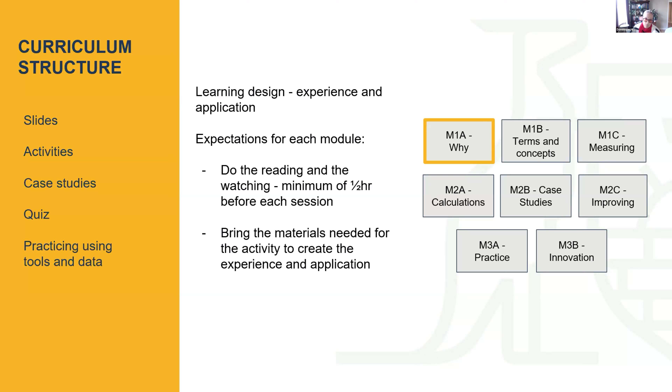The curriculum has us talking to a set of slides, a bunch of activities, case studies, a quiz, particularly if you're doing the CPD aspect for it, and then tools to use. We go from as simple as what does a spreadsheet look like, to material safety data sheets to get the data out of it, or EPDs, environmental product declarations, to get the data. What does that look like? And what does something like Carbon Trace look like? And what do more expansive tools such as the one that Paul spoke to look like?

So you get to watch 8 modules worth of Caroline and I. We taught this live to a group of people here in Melbourne. We've tried to make the presentations as interesting and interactive as possible, rather than just a set of slides that have been flicked through.

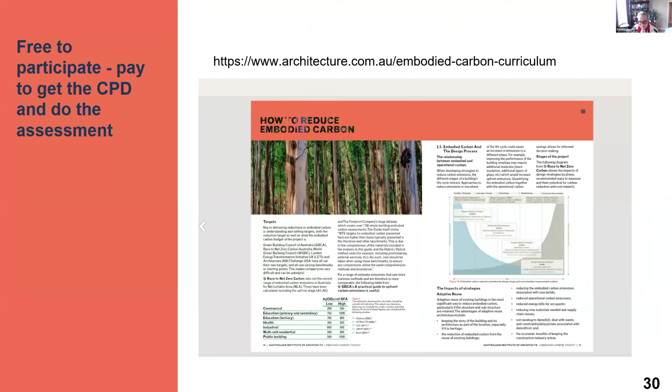I was also asked to give a couple of quick updates, which I'll do now, and then I might go into some of the detail if we need to, but I think we'd probably much rather just be in a panel and ask questions. You'll get these slides. So a couple of quick updates.

I also work on the Circular Economy Ministerial Advisory Group, which has already been mentioned, and how does that integrate with what we're doing in embodied carbon. The committee has a group of 15 people such as myself in industry, in academia, in research, in government, talking together around what are the opportunities, the barriers, best practice, what do we need as far as enablers, how do we measure and communicate it, and making decisions based on evidence.

So we provided an interim report just a month or so ago, and there's a lot more detail in it, and there are links at the end of the slides to get to all of this, but we've looked at focusing where it makes a difference, what are the enablers we need to develop.

A quarter of our recommendations are around market creation and market transformation, because circular economy, which enables lower embodied carbon outcomes, is based on creating a market that enables that circular economy. So the materials need to be in the products that can then be collected to be recycled, to be reused. And we also need to look at that upfront: how do we reuse, adapt, fix, make last longer, and so forth.

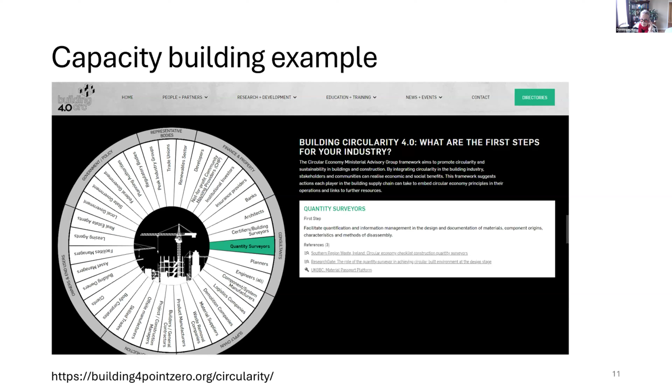So just a quick update there. And lastly, working with thinkstep-anz and ASBEC to do a comprehensive embodied carbon policy framework for the federal government. There's going to be an issues paper out very, very soon.

And then the rest of the slides are really taking you through some of the content of the curriculum, much of what you've already seen in what other people have presented, talking around some benchmarks, talking around various tools, the importance of integrating it into practice. It's not just for the carbon accountants in the practice. What does it look like integrated throughout practice? And of course, the innovation aspect that I've spoken to.

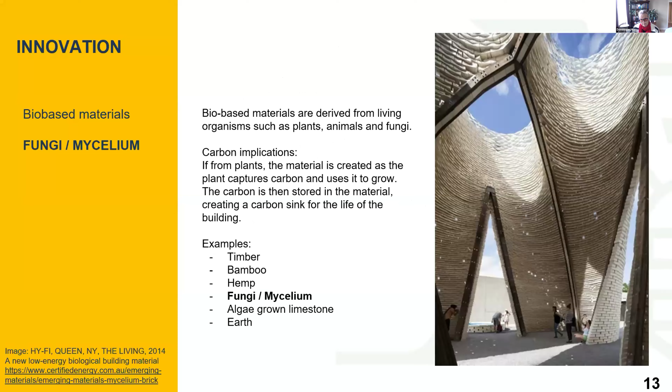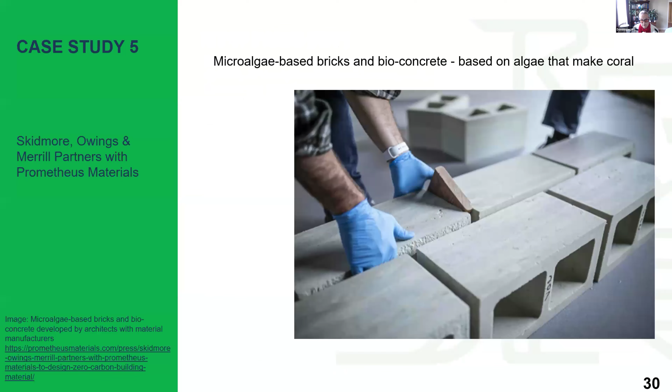Also around how to think smartly, as we've seen with some of the case studies around how we put things together, and also the cautionary tales around some of this. You know, if you get aggregated materials, sometimes it's hard to recycle that. So as I said, there's links at the end. That's my presentation. I'm much more interested in the discussion, so let's move on.